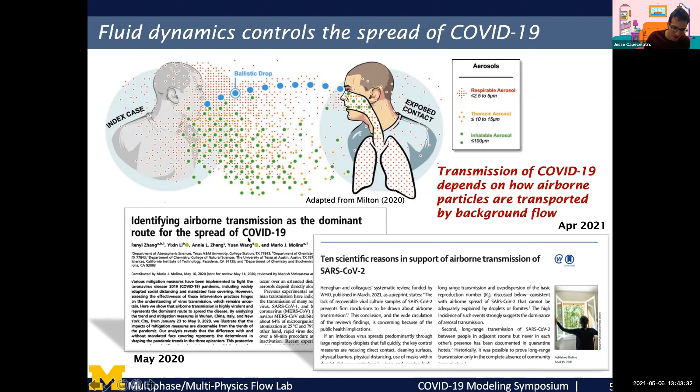The virus itself is 100 nanometers, so it can stick on pretty small particles. And so it seems like it's starting to catch on, but the aerosol scientists I follow have been really pushing this for a long time, and I know it's been frustrating for them. And so therefore, I see this as a fluid dynamics problem. But it's natural to ask, and many of us are asking this, well, what are my chances of getting infected, right?

I gave a talk similar to this to some undergraduates, and that's the first thing they ask: am I safe? What's my chance of getting infected? Seth is going to do a deep dive on this later in this session.

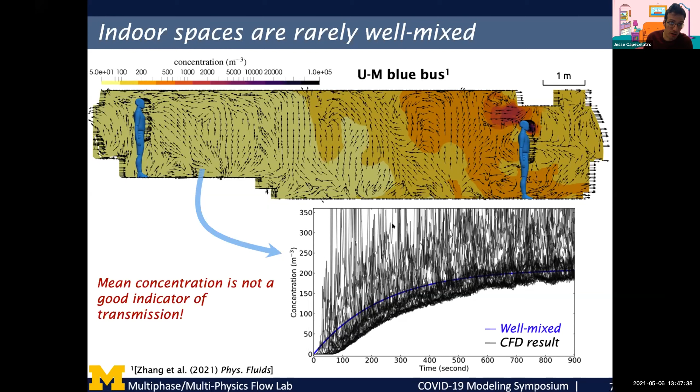And we see over and over and over papers published in the literature with risk being analyzed assuming well mixed, and that's for a good reason, because the alternative is to run the very expensive simulation, and you can't do thousands of those, right?

Okay, so modeling disease transmission is the focus here. We could do that on many different scales, but I think it's important first to look at the particle size distribution. So this is the probability for a typical cough. For a typical cough, you exhale about 10,000 particles. We see that the average diameter is about 10 microns. They can be as large as about 100 microns. So here we have tiny particles, here we have large particles.

We'll call these larger ones droplets. And just think droplets drop, right? Those are the ones that are going to fall down under gravity fairly fast. The smaller ones we call aerosols. Where you distinguish between the two, I'm not very interested in that debate.

But the idea is that from a fluid dynamics perspective, the size does matter, because large particles will be agnostic to the background flow and just have their own inertia, do their own thing. Very small particles will follow the flow, and intermediate particles will follow the flow somewhat, but they can get ejected out of these turbulent eddies and locally cluster and do some complicated things.

So from a fluid dynamics perspective, if you want to know where particles go, their size does play a role. And what I'm showing here is, the virus itself is about 1/10 of a micron, so that's way down here. So that means you can stick a number of these onto these particles, right? So even a particle as small as 1 to 10 microns can hold a couple of these viruses. And obviously, the larger the droplet or particle, the more virus it can hold.

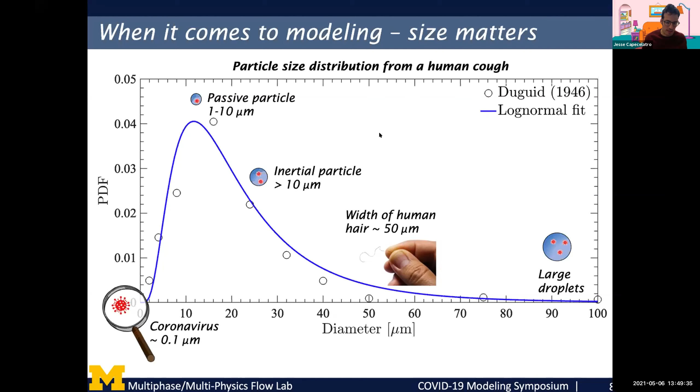So if we wanted to try to predict where these particles go in the flow, I'm breaking this up into sort of 2 scales. One is what I call the microscale. So this would require, let's track each individual one of these particles that leave our mouth, follow where they go, and those particles are going to move according to Newton's second law of motion. So all I'm showing here is force equals ma, where the forces acting on this particle will be due to drag by the flow. So when you cough, there's a turbulent plume or jet leaving your mouth, expelling these particles, and then they're susceptible to gravity.

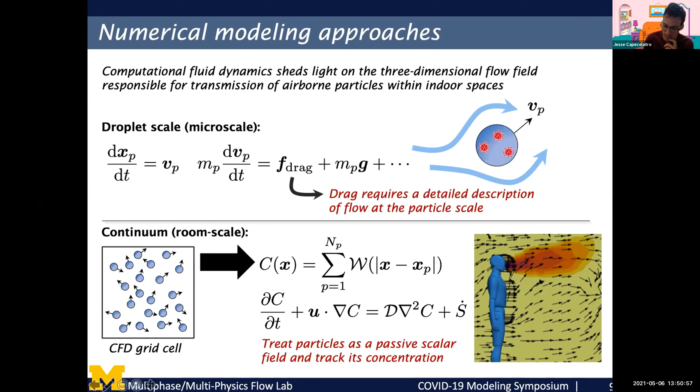Now, obviously, that's not going to be tractable if we want to look at transmission in a classroom or a bus. And so an alternative approach is to make a continuum approximation. So we'll say in one of our grid cells in our calculation here, we have a large number of particles, and we're going to estimate a concentration based on that. And then we're just going to treat this as basically a passive scalar and solve for the transport of that concentration. So now we don't need a resolution down to the scale of an individual particle and track each individual particle. We can just transport the concentration itself. And what I'll do in the next 5 minutes is sort of show an example of each.

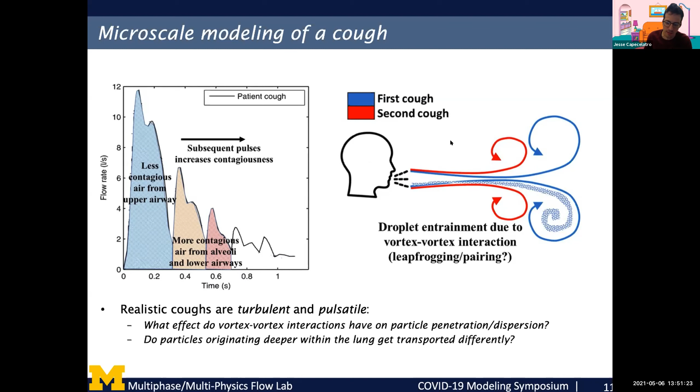And so it turns out realistic coughs are sort of complicated. They're pulsatile. So this is the flow rate from a human person. You can see that there's 3 pulses within a second of a realistic cough. And we had a question, this is more of an academic exercise. If you have this pulsatile jet leaving your mouth, we thought, well, that'll lead to vortex-vortex interactions. What effect does that have on dispersion? And so I had an undergraduate and some of my grad students run these simulations.

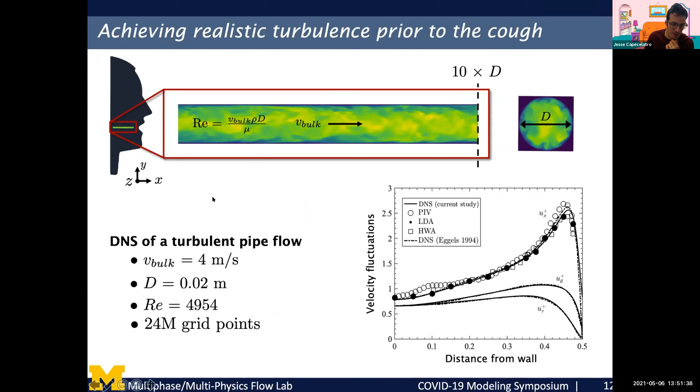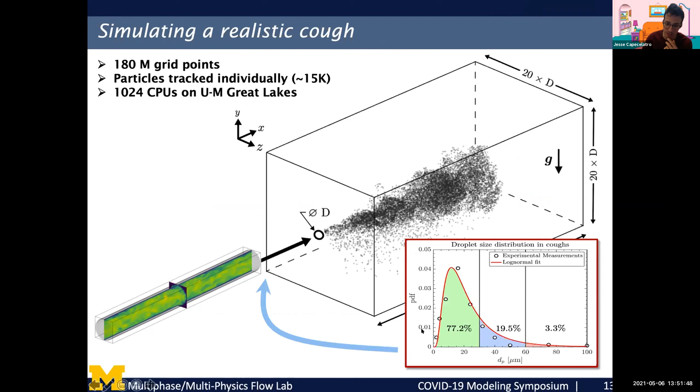What we wanted to do is have a realistic turbulent flow leaving the mouth. So we ran this auxiliary simulation. And then what we did is we fed that into this second simulation. And this turbulent flow is now injected with particles using a size distribution informed by a realistic cough. And you get something like this. So this simulation was done on UM's supercomputer Great Lakes with 1,024 processors and required an order of days to run. These particles are bigger than they actually are, just so we can see them. But it shows you how complex the flow structure is.

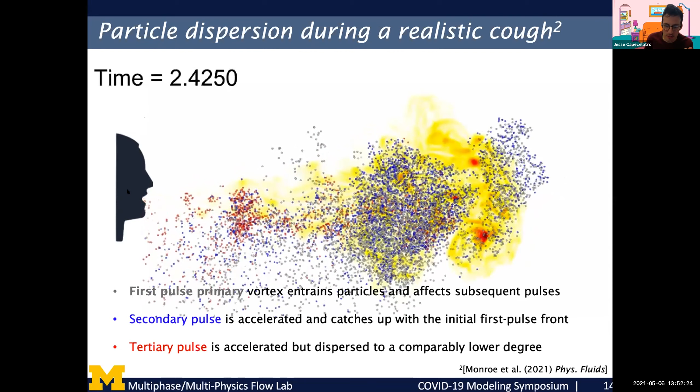You get these sort of vortex rings, or you can think of smoke ring sort of formation, and particles that are emitted later on that might originate deeper in your lung and contain more virus travel differently. So this led to essentially a publication and an NSF project. But again, I see this more as an academic exercise. And if we want to start looking at decision making, we have to really go to larger scales. And so that brings us to, let's not track each individual particle, but track its concentration.

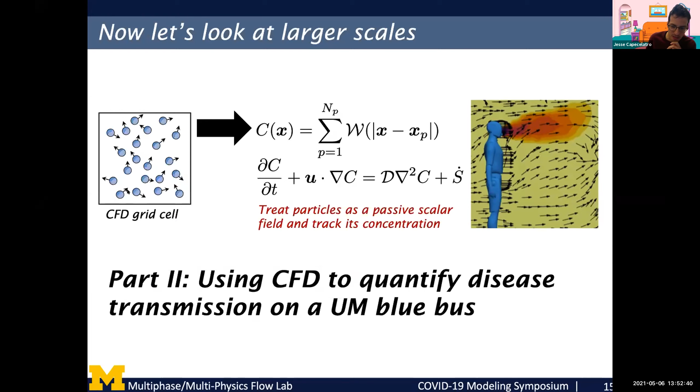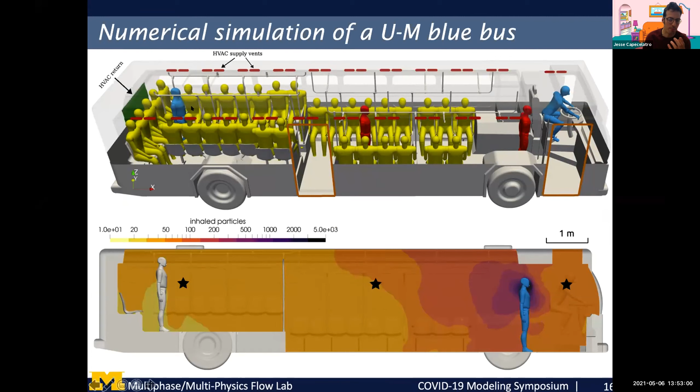And so one exercise we did was we wanted to look at the transmission on a bus. So we hired a company to come in and scan one of the blue buses. We put these sort of mannequin people in here and created a mesh. And we said, if we have a sick person in one part of the bus and a susceptible person throughout the bus, what's their exposure look like? And we can start asking questions. If you open the windows or close the windows, the airflow changes.

With open windows, you get this sort of rotating flow, which is interesting because now the people in the back aren't exposed to the same amount of flow. Anything that someone breathes in the front, it's not really going to reach them because they're going to be recirculated here. But what's interesting is that the return in the back of the bus is operating in such a way that if someone breathes or coughs or expels any type of particles anywhere on the bus, within about 45 seconds, everyone else is breathing it in.

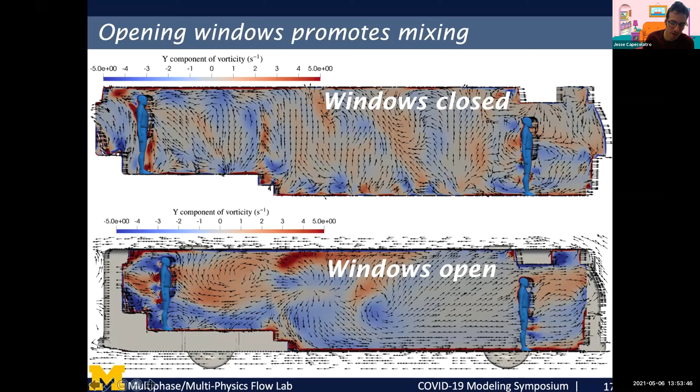That's just due to the back of the envelope calculation with the volume of the bus and the airflow rate of the return. And so that's a fun fact to think about. But the big thing with open windows is it brings in fresh air, it dilutes the concentration. So we could start looking at windows closed, more people are exposed to higher concentration than windows open, for example.

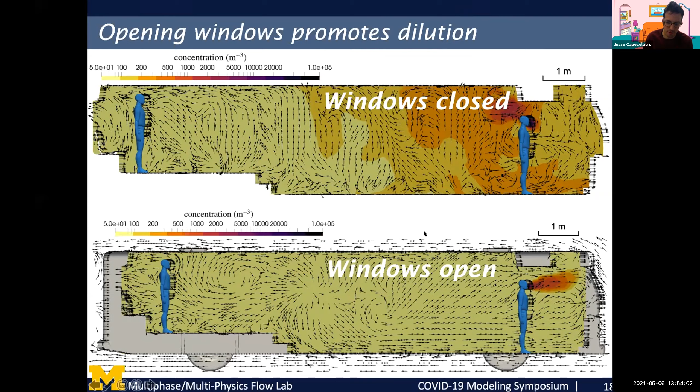And then we could start looking at, well, let's come up with some thresholds. Imagine if you breathe in 1 particle, you're probably not going to get sick. If you breathe in 1,000, you probably will get sick. And so let's come up with some conservative estimate at 50, and say if you breathe in 50 particles, we'll say you're going to get COVID. Otherwise, you're not. This is somewhat arbitrary, but we can start to look at how this transmission changes when we change parameters.

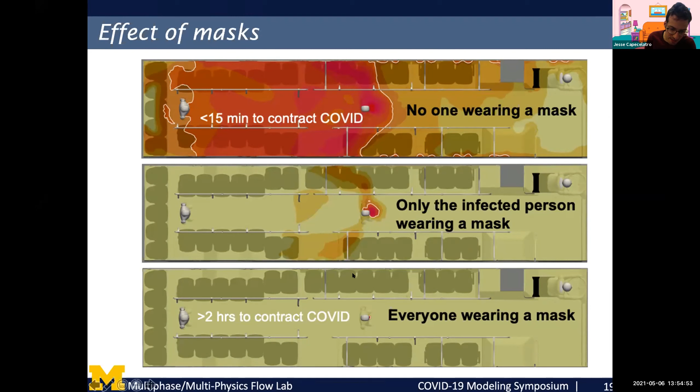And so this white line is showing if no one wears a mask, and there's a sick person over here, that these are the number of people, if they're on the bus for less than 15 minutes, who's going to breathe in more than 50 particles. If only the infected person is wearing a mask, that goes way down. And if everyone wears a mask, it goes down even more. But the efficacy of the mask plays a big role. I think we're assuming 90% effective mask. In reality, it's probably 40%.

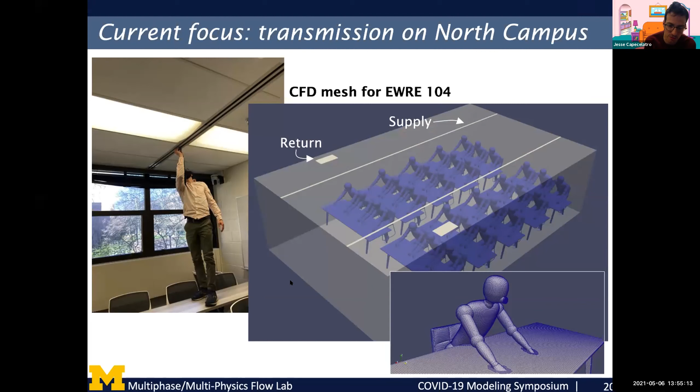And I apologize if I'm going over. The main idea here is we're moving forward with this, and we're using this code that our team's been developing to look at transmission in classrooms. We can look at the effect of what if we're a 3-foot space versus full capacity, and so forth. But what we want to do in the end is tie it back to that well-mixed model, right? Because if you want to plug this into a dose-response function and actually assess risk, we can't do a CFD calculation for every room on North Campus.

And so the plan here is, let's start quantifying the uncertainty, bring in locality, look at the spatial distribution of concentration. A well-mixed model will tell you it's a delta function. You have one value of the mean, but the CFD will give us distributions. And we're hoping to augment or add corrections to these well-mixed models so, it might be on average your risk is low, but if you're standing right next to someone who's sick, your risk is quite a bit higher. So how do we incorporate that locality into the model? And that's what we're really focused on right now, and working with a number of experimentalists and other modelers to address the transmission in classrooms.

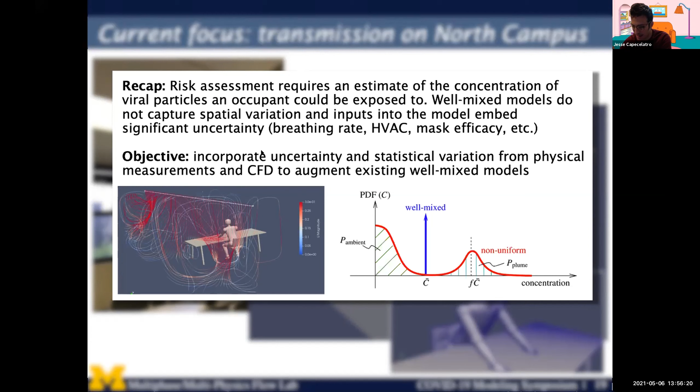So I don't see any questions in the chat, but I have a question for you. So much this has been such a focus of debate, this idea of how close is too close and how far is far enough away, kind of based on these previously pretty arbitrary 3-foot, 6-foot types of definitions. Do you think that we have the tools to answer those questions?

Oh, sure. Yeah. I mean, the 6-foot rule came about, my understanding is, from a German study in the late 1800s. And then there's some work by Wells in the early 1900s. And clearly the idea then was you breathe out particles, the big ones fall, the small ones evaporate, and they fall within 6 feet, you're fine. But in reality, you're breathing out this moist, turbulent plume. And so the evaporation's hindered. And there's been really nice studies from MIT where they have a well-controlled experiment of someone coughing, and with no background flow, the cloud of particles can travel 24 feet.

And we know if you're indoors and there's heating and air conditioning, really what it comes down to is social distance means there's less people in the room, which means there's less likelihood that someone sick is in the room. You can't discount the fact that if someone right next to you sneezes on you, now you're breathing in a large portion of that, right? So that is indeed important.